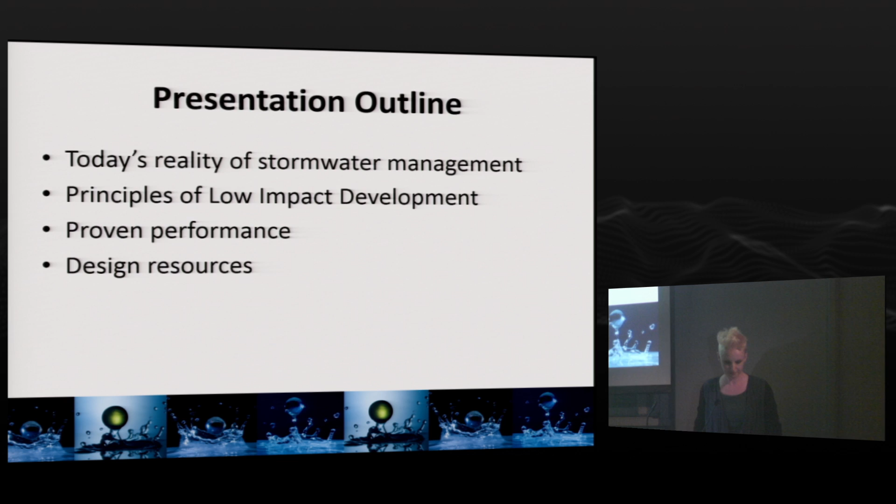So today's reality: well, I think everyone is aware, particularly with the events over the holidays as well as last summer, that our infrastructure is really under stress. And our stormwater systems have stress from a number of major factors.

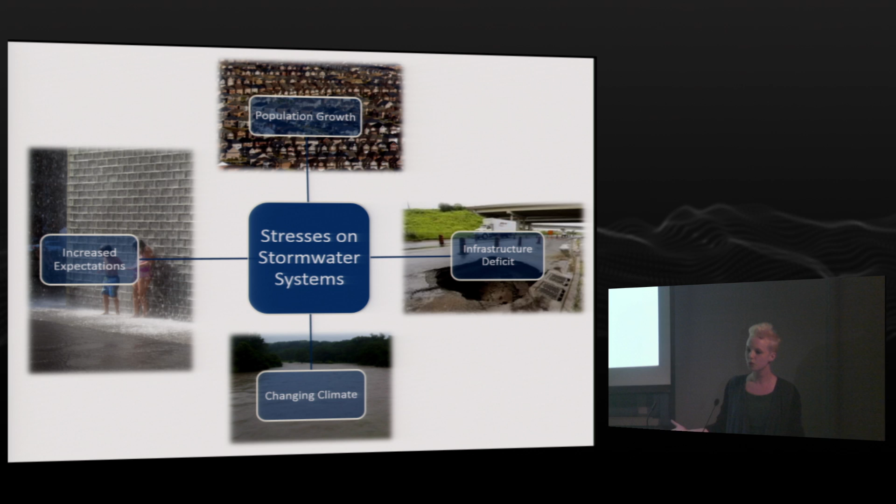The first is population growth - we have 50,000 people come to Toronto every year, and that's expected to continue for the foreseeable future. That builds water demand. On top of that, we have an infrastructure deficit, I'll give you some numbers about that in the next slides. But then we also have changing climate, which in Ontario means an increase in the frequency of extreme events. And lastly, every day our populations are demanding more of their water services. They have increased expectations. We want our water resources to not only give us clean drinking water, but we also expect to have recreational areas, and we expect to use water for a variety of purposes, sometimes with conflicting requirements.

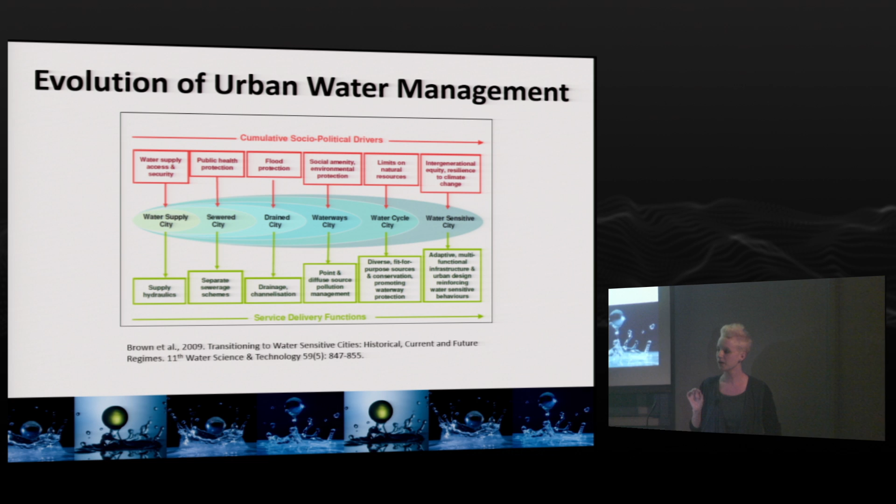So there's been an evolution of urban water management, and we see this throughout the globe. As cities have evolved, we start with just water supply, providing the necessity of life. But from that, we've grown, and we have subsequent infrastructure systems - the sanitary systems, then a storm system, then moving beyond that to whole waterways and water cycle focuses. So we recognize that if we want to have drinking water, we have to look at the big picture. It's not just - you can't just take one piece of the puzzle.

Some notable things that are specific to Ontario - most importantly would have been the Hurricane Hazel event. This has really defined flooding conditions and what's possible in terms of flooding as we've experienced it to date. And it led to the legislation that created the conservation authorities that we have today. Also, very significantly, it implemented decades ago floodplain management, which prevents development in areas adjacent to rivers where you're in areas of high extreme risk of flooding. So you don't have people there when the waters come, we don't have to rescue them, and we're not going to be worried about deaths or loss of property.

Moving forward, there's a real transition around 1980 where we start to see subdivision development post-1980 starts to have consideration for quantity control of stormwater. A lot of neighborhoods pre-1980 are built without a huge consideration as to where's the water going, what's the grading, what is going to be the capacity. And so we have a legacy of neighborhoods that don't necessarily have infrastructure that has been designed for stormwater management.

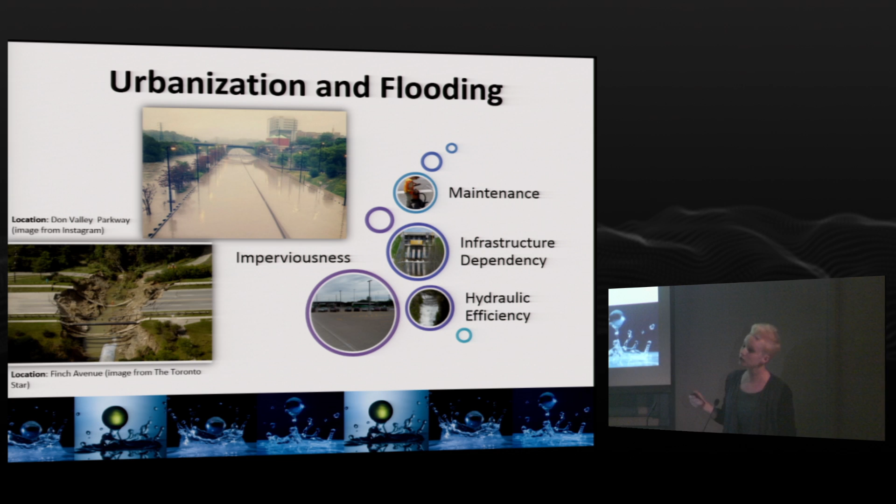We also have legacy problems such as the Don River, which has been channelized, moved, and restricted. So when we have these increased flows, there just isn't the capacity, and they spill over to elsewhere.

So the economics of all this are pretty astounding. The Canadian insurance industry, excluding this year which is a record book one, basically pays out approximately $1.7 billion a year in water damage claims. This number is even more impressive when you recognize that we do not have overland flow insurance in Canada. So any water that gets into your house running through that window at grade, you can't get insurance for that water. There's a lot of damage the insurance company isn't even paying out for.

On top of that, we know we have an infrastructure deficit. The Canadian government estimates this at $123 billion, and about $31 billion of that is infrastructure systems related to water and wastewater.

Lastly, the default system we've been using for all of our suburban development, stormwater management ponds, these are essentially collection systems designed to collect sediment and require their own maintenance, meaning excavating and removing that sediment once they hit their lifespan of about 15 to 20 years. The cost of these individual cleanouts is huge, ranging from $200,000 to $1.5 million.

The numbers of ponds that municipal cities have is also staggering. If you look at a city like Mississauga or Vaughan, developed post-1980, they have ponds in the hundreds that are just waiting, filling up with dirt year after year.

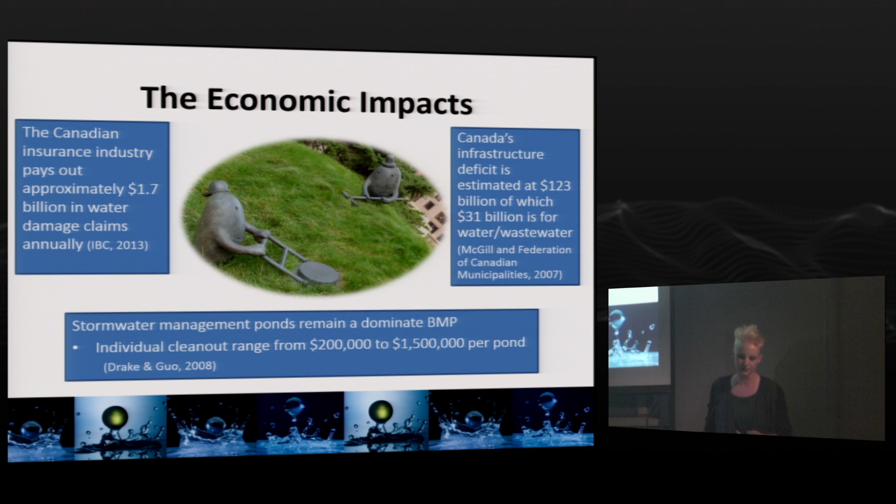So what is LID? It's a stormwater management strategy, a planning and design process. It seeks to mitigate the impacts most commonly associated with urbanization, which is runoff and stormwater pollution, through using a range of systems, strategies, and approaches which mimic as best as possible the natural flow path and natural water balance.

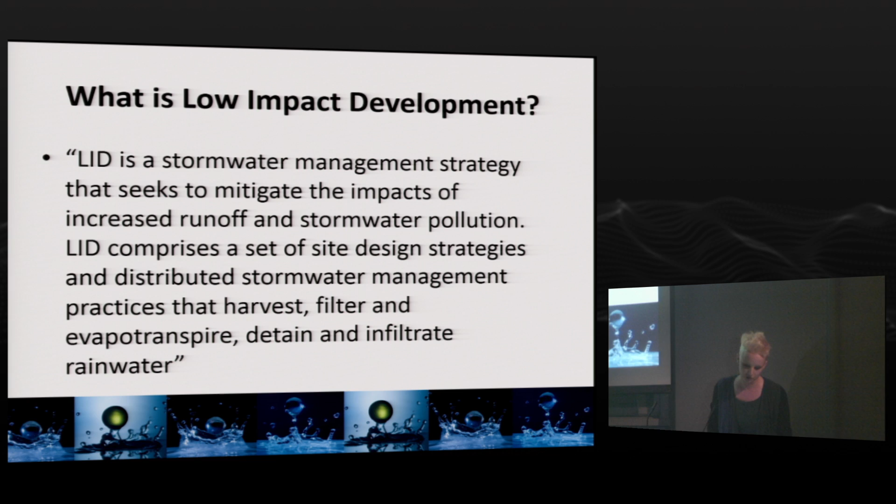The Toronto and Region Conservation Authority outlines 5 principles. Fundamental to these principles is the concept of a treatment train approach—actually following the water through the neighborhood, through the catchment system, and allowing for treatment and management along the way.

So you start with the source, and treat as much as possible at the source, convey it, and where you can, provide additional treatment and management while it's traveling to the end-of-pipe system, and finally end-of-pipe controls.

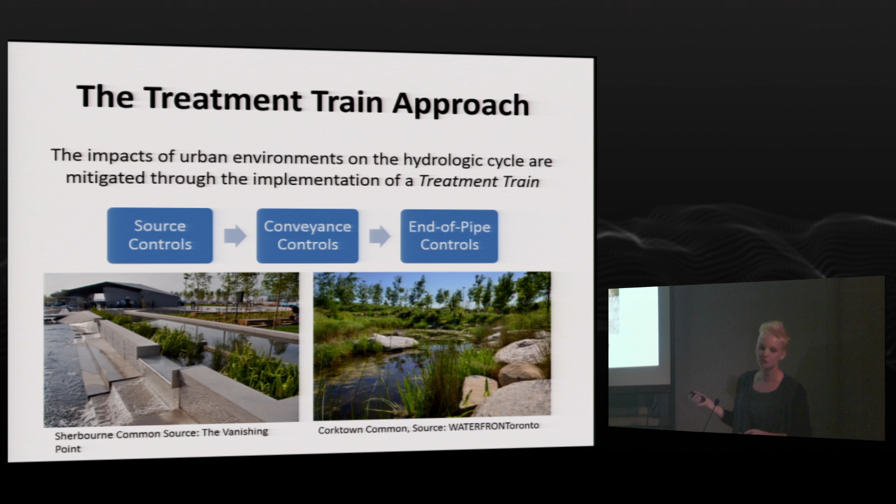So what we have here are two examples. This is Toronto's Sherbourne Common, where you can see filter beds that have been installed while the water is being conveyed to a collection channel. And this is the most gorgeous example of a pond I'm ever going to show—the Corktown Common and their stormwater management pond, which is an end-of-pipe approach or system.

The economics of green infrastructure is also gaining notice, and by some big players. If you look at most of the major cities in the US, they are all including green infrastructure as part of their 50-year plan for managing their city.

New York City estimates they will be able to save about $1.5 billion in investment by implementing green infrastructure, which reduces the number of combined sewer overflow events. And Philadelphia's Triple Bottom Line study found that LIDs offered almost $3 billion more in benefits than a traditional gray system.

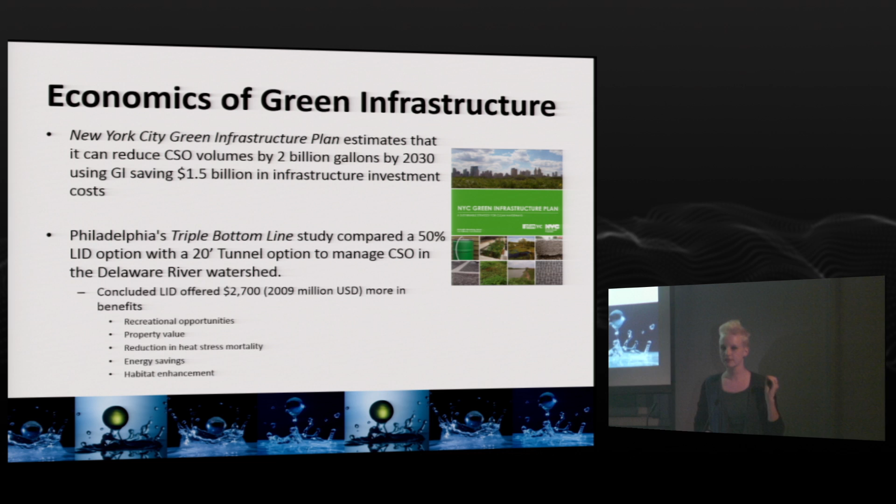So there's an economic argument that is making sense, which is supporting these technologies. The principles of LID, the first one, and if many of you are architects, this might seem like common sense, but to engineers it's not so much, is to plan and use the natural system as the starting point. Use the natural features that we have, the geology, the watershed scape, as our framework for planning our communities.

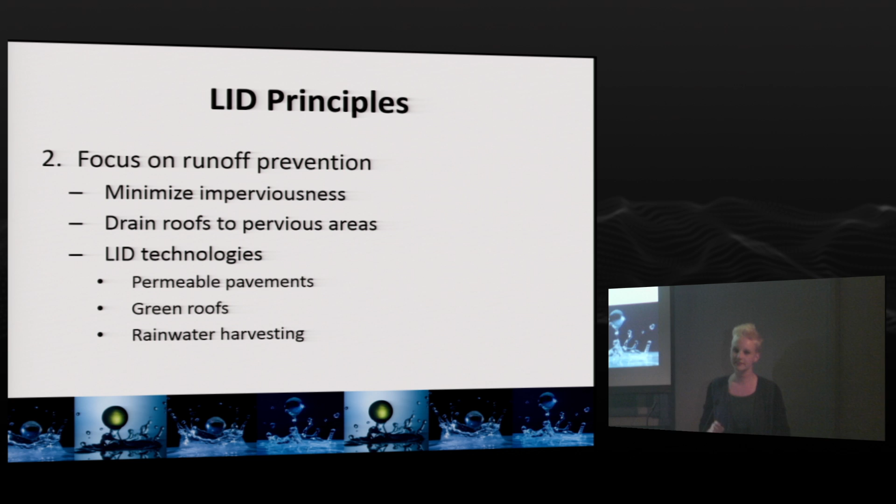It's mind-boggling for engineers. The next one is to focus on prevention, so minimizing imperviousness. Why do we need 4-lane parking garages? Maybe we could reduce that to 2. Or do we need to have a ranch-style house? Can we reduce or optimize the home so that we minimize the roof area? And then integrate LID technologies like permeable pavement, green roof, or rainwater harvesting on site so they can treat it.

This leads to my third one, which is treat stormwater as close to the source as possible. This is a really important planning paradigm shift because we're inverting the entire system. Instead of using end-of-pipe centralized controls, we're now spreading the management out so that everyone is a part of the management system, and everywhere along the way we're executing flood control and quality treatment.

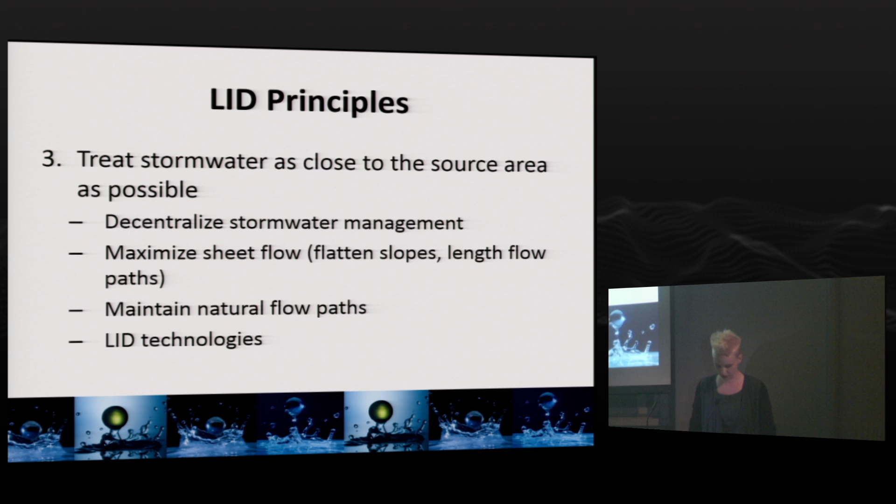The fourth principle, and again I think architects might find this fairly common sense, but for the engineering community it's a little bit of a light bulb going off, is to create multifunctional landscapes. As water resource engineers, we've dealt with this for years, that we expect many things from our water resources. We expect them to support industry and manufacturing and drinking water and fishing and recreation. So when we plan our communities, we need to recognize this.

It also leads to the way we manage public space, integrating stormwater systems into common areas like public spaces and the right-of-way. And lastly, it leads to designing for aesthetics. So why make our stormwater systems ugly? Let's make them enjoyable. Let's make them places that people can go and use and have a healthy life.

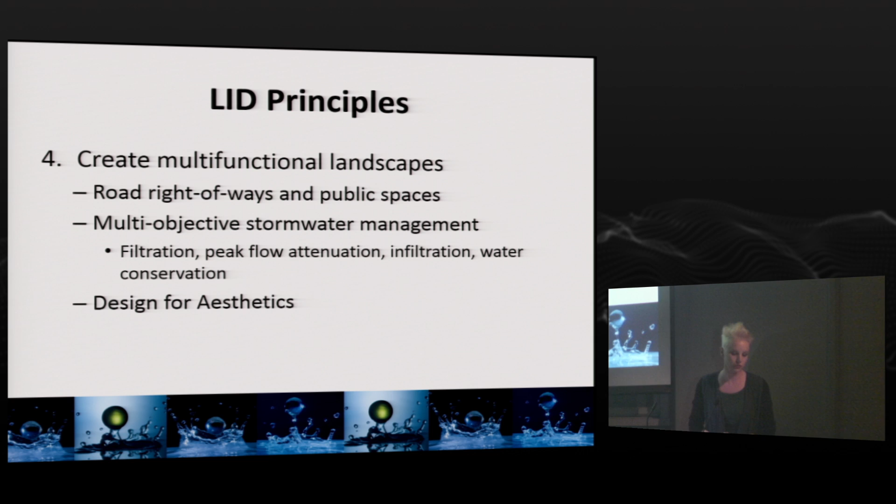The last main principle comes to education and maintenance. Because at the end of the day, these are still, although they might be soft engineering systems, they're still infrastructure, and they need to be maintained to be working functionally. So we need education for property owners, for municipalities, property managers, so that they know and value the stormwater systems that are under their control.

I can't tell you the number of times that I've called someone up to say, I'd like to visit your permeable pavement, and they go, my permeable what? Even though it's been 5 years, the property's changed hands, the new owner isn't aware that they have a really special parking lot. And this, because we're encouraging management on site, we need to establish new legal systems to ensure that we have a way of enforcing that maintenance is taking place.

So I am a big proponent of LID, and you might be wondering, if it's been around since the 90s, why don't I see it everywhere? These are the main challenges, and they still persist to this day. The first thing I find is when I talk to someone about LID who's had experience, the first thing is, oh, I remember I saw a technology or a system and it didn't work.

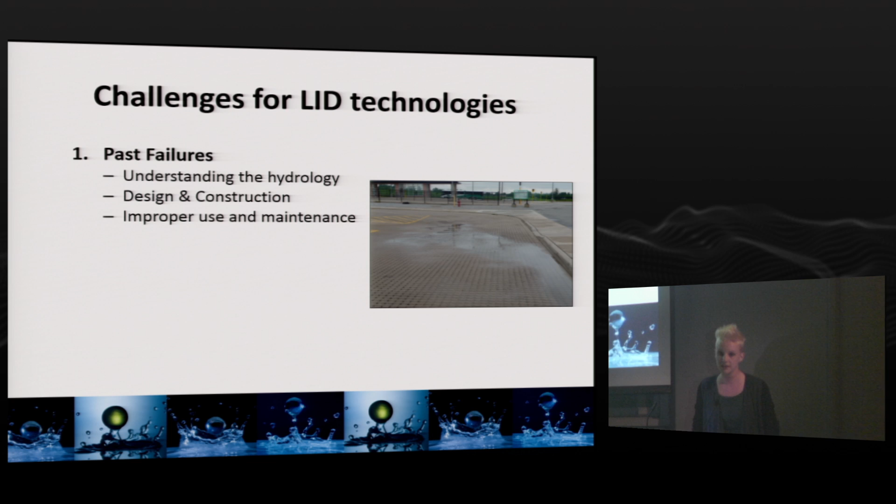With any new technology, there's a risk-taking factor that we can't avoid. When you're innovating and trying something new, chances are it's not always going to work out great the first time. This legacy of past failures and mistakes and learning that has taken place really sticks in people's minds and makes them very reserved about learning about the changes that have taken place over 30 years.

The next major obstacle is the issue of private ownership, and municipalities are still grappling with how are we going to manage this and how are we going to be confident that the oil grit separator in the new shopping complex is getting cleaned out every year.

There is also, in many cases, an emphasis on the industry just to sell the product and then walk away. And so maintenance procedures really haven't been developed or explained. So even if someone wants to properly maintain it, they may not have the resources available to tell them how to go about doing it.

The other challenge is, how do we actually do the math when it comes to the cost dollars? Because we're completely changing the system, moving who's responsible for management from public to private, there's a perception that private enterprise may not appreciate the services they're receiving on site because they had been done for free by someone else in the past. So we have this challenge of accounting for benefits and understanding the true costs and life cycle costs of these systems.

And then lastly is public education. Sadly, many engineers today, if you're getting training at a university, you might not learn how to design a permeable pavement system. That's really not part of our curriculum yet. So we still need to educate a whole new generation of designers to create these systems.

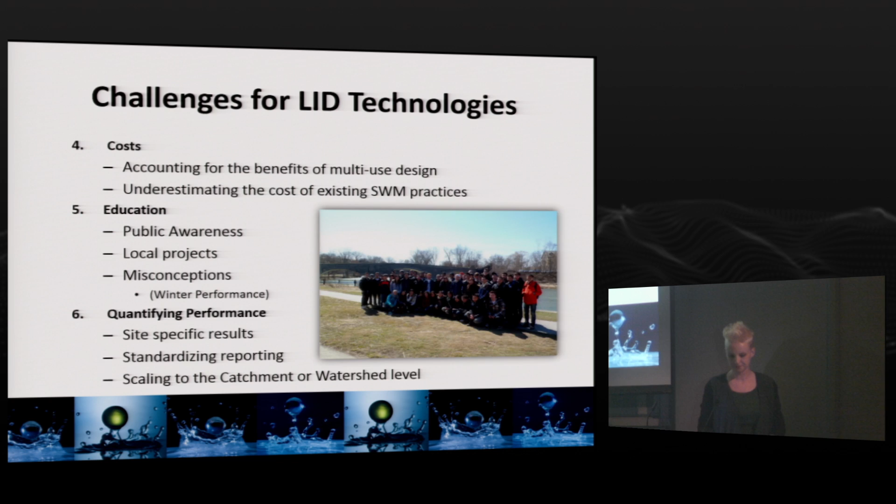Now, before I start talking about some examples in Ontario, one other major change taking place here is an adjustment for how cities see stormwater management. For the first time, they're really recognizing that it is a service that, like any other service, has a dollar value attached to it. The front runner for this was the City of Kitchener, who implemented a stormwater utility in 2011. So residents of Kitchener now pay a stormwater utility tax based on the impervious area of their property - based on how much stormwater they're generating.

The second phase of this, which they're now rolling out, is a credit program where residents can receive a credit if they implement systems that allow them to treat and manage stormwater on site. And if you were skeptical that maybe this is or isn't catching on, the City of Mississauga has voted through almost identical legislation in the past year. So we've got some really big cities changing, basically putting dollar values for the first time ever on stormwater management.

Now, this is probably what everyone's really waiting for, the interesting stuff. I'm going to talk about 3 of the most popular permeable systems in the province, starting with my favorite, which I've done a lot of research on: permeable pavements. In case anyone isn't familiar, a permeable pavement is a system with a regular paving surface, but it's designed to have either a very coarse surface, like this pervious concrete, that has voids, or an interlocking block with open joints filled with coarse aggregate. So rainwater, when it falls, goes straight through into the underlying aggregate layers.

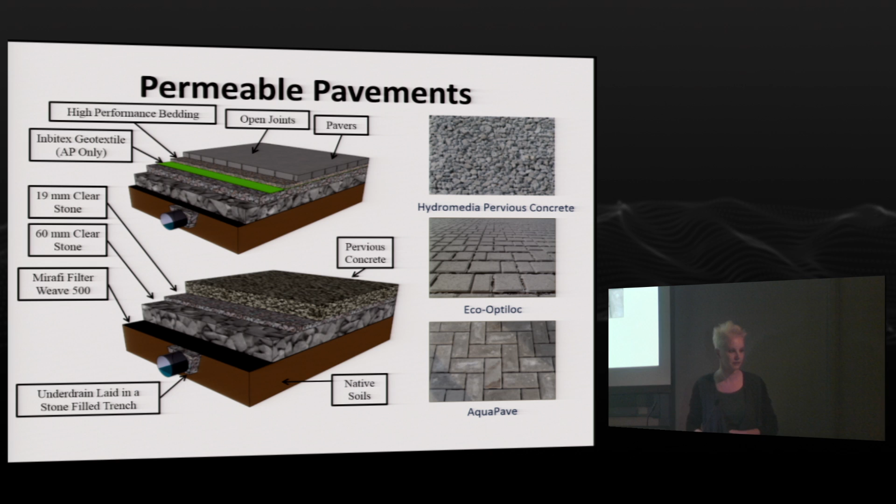What I have here are 3 products that I have tested with TRCA: pervious concrete, Eco-Optiloc, and Aquapave. Another product that is available but we don't see quite as much in Ontario would be pervious asphalt - it's very popular in the US, not so much here, not really sure why. The site I'm going to give you some information about is the Kortright Permeable Pavement Parking Lot, in Vaughan. At this site we studied 3 side-by-side permeable pavements and a regular asphalt parking lot for 2 years to actually see how well these guys work.

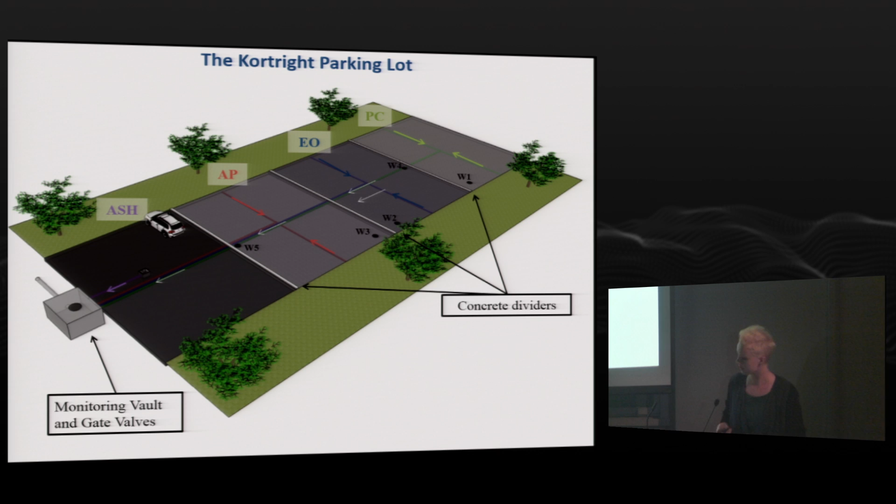What we had is, basically, we constructed - you can't see it, but where that little orange pylon is, right at the base, we have a below-grade monitoring vault where all our equipment was stored. We had control valves so that we could actually close them and hold the water inside the pavement and the aggregate if we wanted, or open them up.

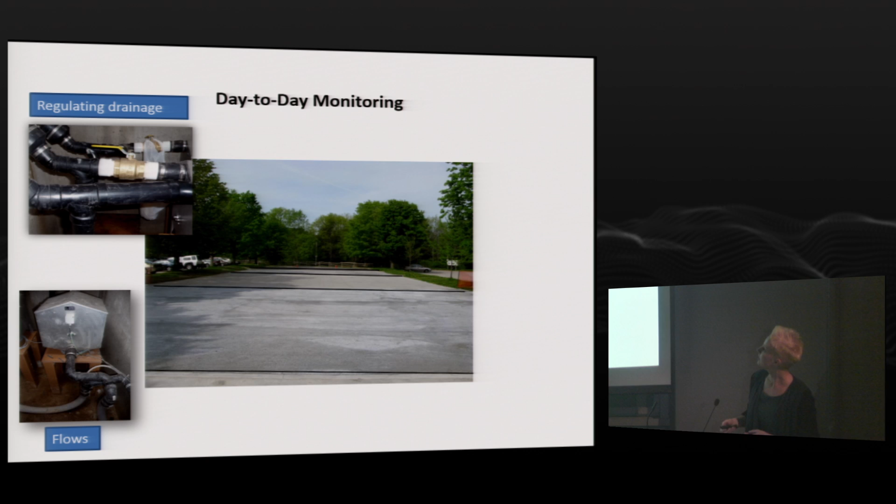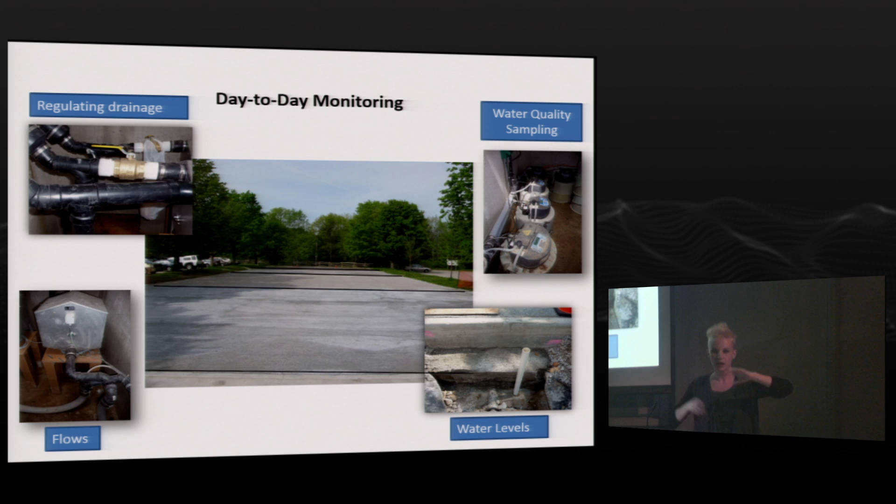We had tipping buckets so that we could continuously measure the flow of water out of the pavements from the base. Samplers so that we could collect water samples during a rain event and actually look at the quality of the effluent and the runoff. And then wells so that we could see how high that saturated amount of water was inside the pavement. And this is what we saw.

This is a typical storm. We've got a little rain event here. You can see we had a little bit of rain, and then you get a typical summer storm, a short period of high-intensity rain. What you see here in the black is the water coming off that asphalt. It's instantaneous - as soon as it gets wet, it's into the catch basin and it's going out.

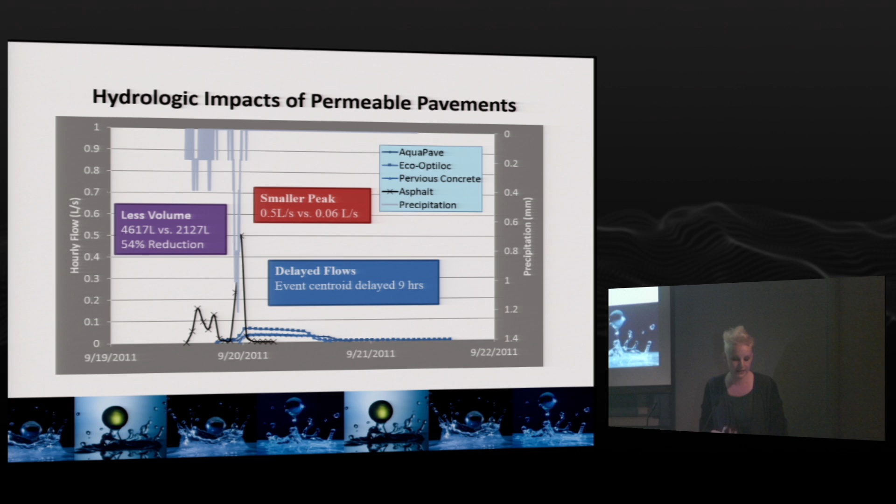So you have really peaky amounts. The permeable pavements, however, take a longer time. That water has to infiltrate. It takes time before it's going to leave. And then when it does, it comes at a very slow, steady rate, resulting in a very gentle and long trickle. So we saw reduced total volume, reduced peak flow, and delayed flows.

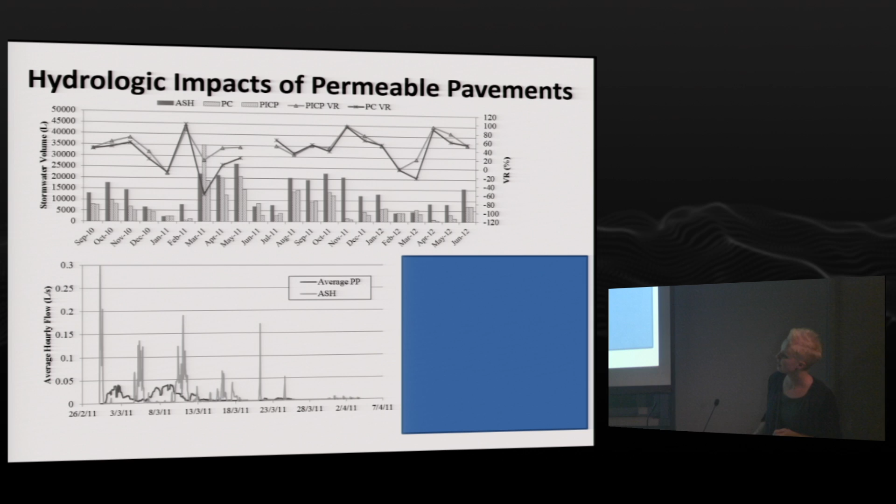When we looked at the entire study, you can see these columns - the dark one is asphalt, and then these are the permeable pavements. This is the volume reduction calculated each month. What we found overall was a 43% reduction in the total stormwater outflow.

We monitored about 130 rainfall events. Only 59 produced anything coming out of those underdrains. The rest of the time, all of the rainwater was captured, infiltrated, or evaporated by the permeable pavements. When it did produce effluent, the peak flows were reduced by at least 50%. On average, it was closer to 90%. We had a few extreme lower ones in the winter.

And we would always see an increase in detention time. These benefits, these patterns, happen in the winter as well as in the summer. What you can see here is our spring thaw of 2011. This is the runoff coming off that asphalt, and the black is the permeable pavement. We actually shifted the center of that spring thaw by 3 days - we delayed it by 3 days.

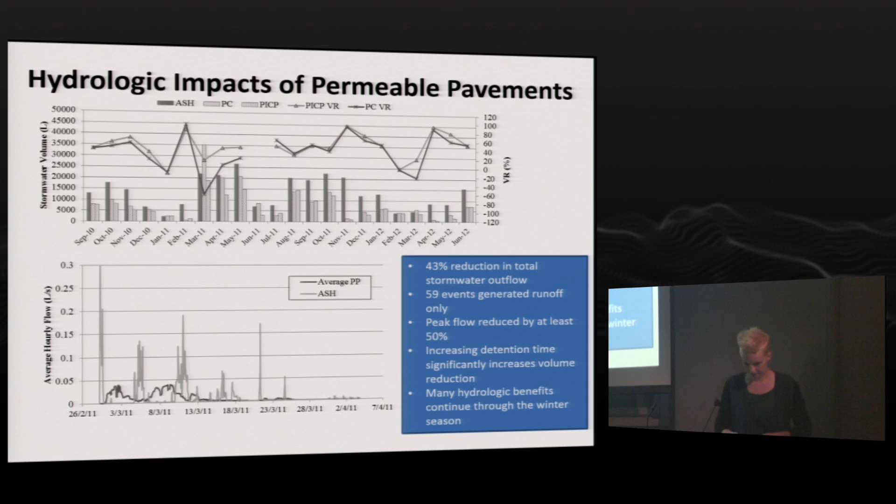We also saw big benefits to quality. So it didn't matter if you're looking at suspended solids, heavy metals that are of concern like copper or zinc, or even nutrients like nitrogen or phosphorus. Because the permeable pavements are a passive filter, they can remove the particulates in the stormwater and produce a cleaner effluent at the end.

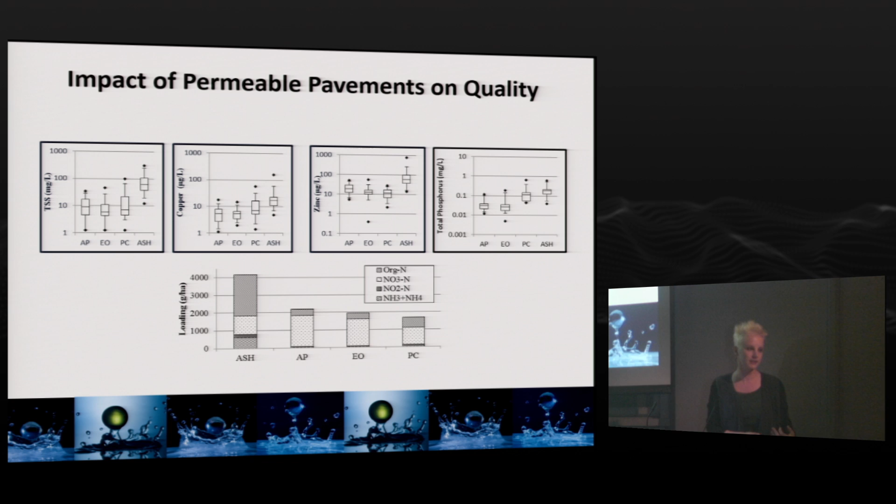We also saw for complex things like nitrogen, detaining the water allows for some denitrification to take place, and we actually changed the species of nitrogen, eliminating forms such as ammonia, which is very harmful for aquatic organisms.

Now, permeable pavements do clog. This is something that is going to happen - I'm not going to try and beat around the bush. It's a process that is very product dependent, because it's directly related to the amount of area you have on the surface. So if you have very narrow joints, you're going to have to maybe clean it a little bit more frequently. What we saw here are just some ranges.

This is the surface infiltration capacity - sorry, I don't have a label here, but this is the pervious concrete, Eco, and Aqua. So the more surface area you have, the longer it lasts, but they are all going to decline over time. As you can see, this is over 4 years.

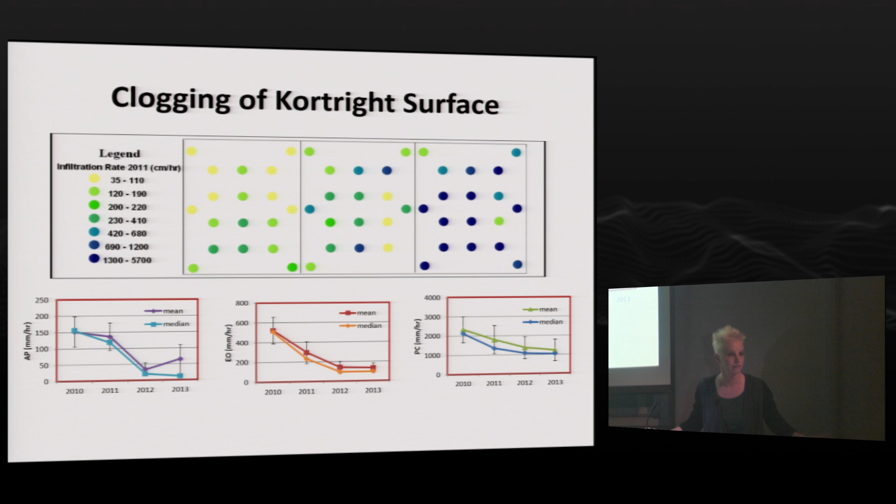But it's important to note, the infiltration capacity of most of these systems is an order of magnitude higher than the rainfall intensity we ever receive in this province. So we still have, even after 4 years, on pervious concrete and the Eco-Optiloc, we don't have any runoff. Everything goes into these permeable pavements.

Now, the next product I'm going to talk about would be green roofs. Green roofs are very popular here in Toronto because of the bylaw. In case anyone isn't familiar, a green roof system is a thin layer of vegetation and soil media.

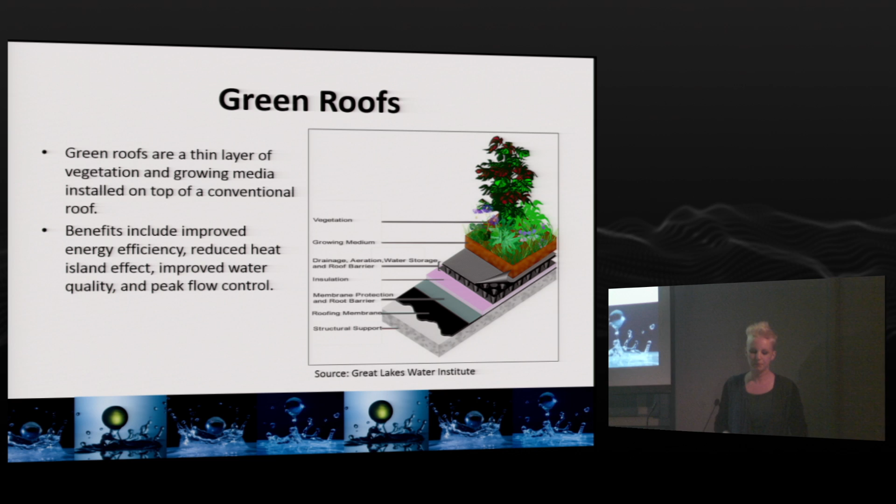The benefits are multifunctional. It provides benefits to stormwater management, but also improves energy efficiency and reduces urban heat island effect.

And the most exciting research that's going on is actually right here. This is a picture of the Grit Lab, which I'm so privileged to be working with now. What we're trying to do here at the Grit Lab is really provide the information that industry needs to maximize this technology for evapotranspiration and stormwater management.

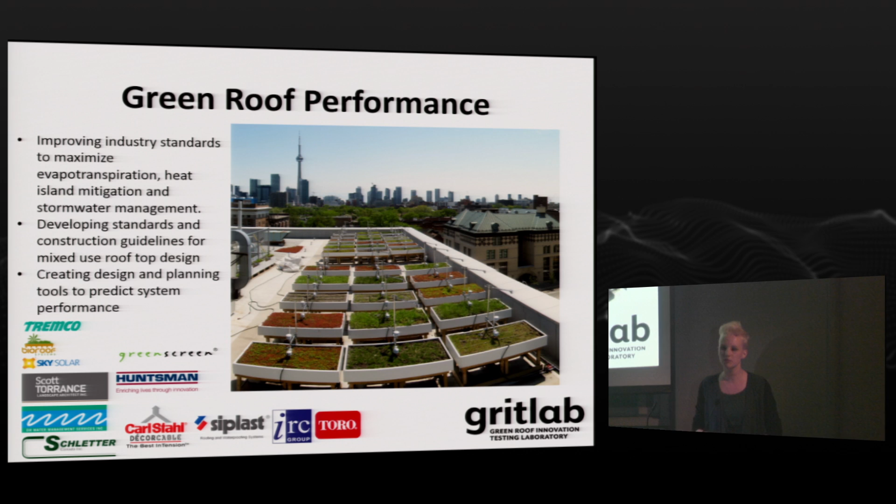So how can we really customize the systems so that they're optimized for the climate we have here, which will allow us to come up with improved and more appropriate standards and construction guidelines, and then develop the design tools so that we can really predict accurately the performance of these systems.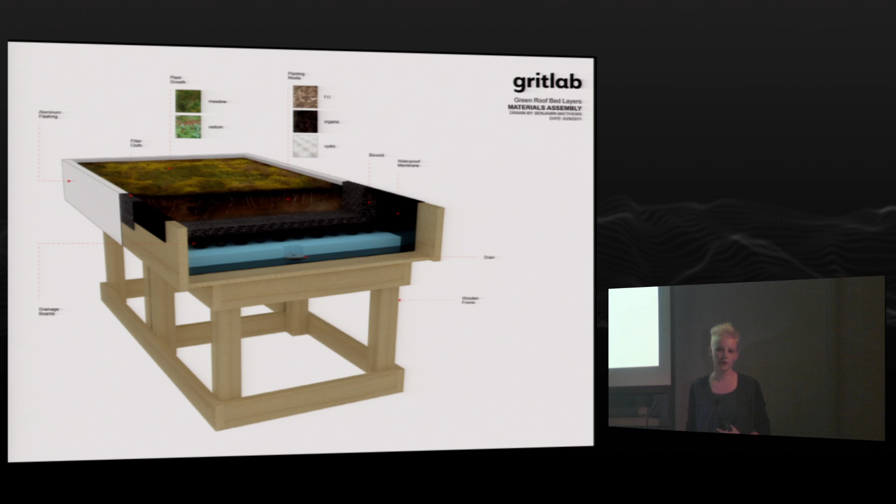What we're looking at, and this is a figure from the Grit Lab, is we have testbed modules looking at the different components that go into green roof design. So we're looking at things like the substrate depth, the planting media, as well as the soil media, and then the irrigation regime. We're going to see how these different things affect the performance, the resilience, and what combination is really going to allow us to maximize stormwater management.

And it's a 12-year process. This is a picture courtesy of my graduate student, Jen Hill, of the lab just a few weeks ago. It's fascinating because the longer you look at something, the more details you start to notice.

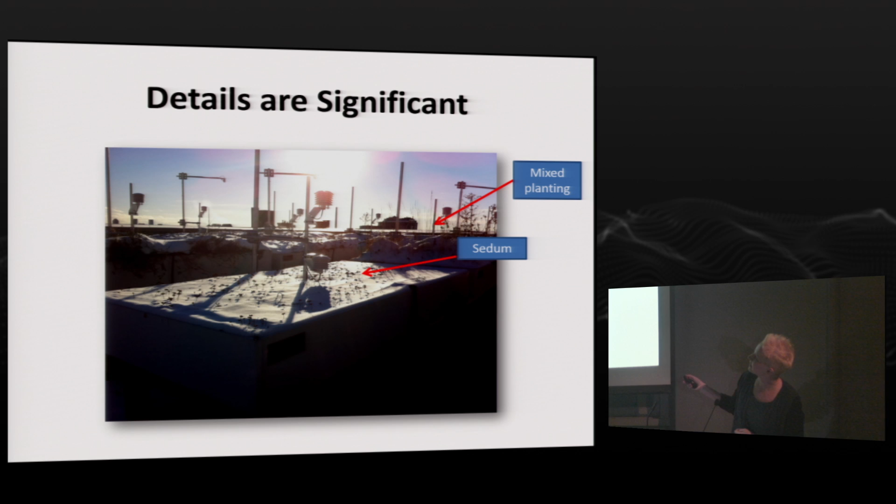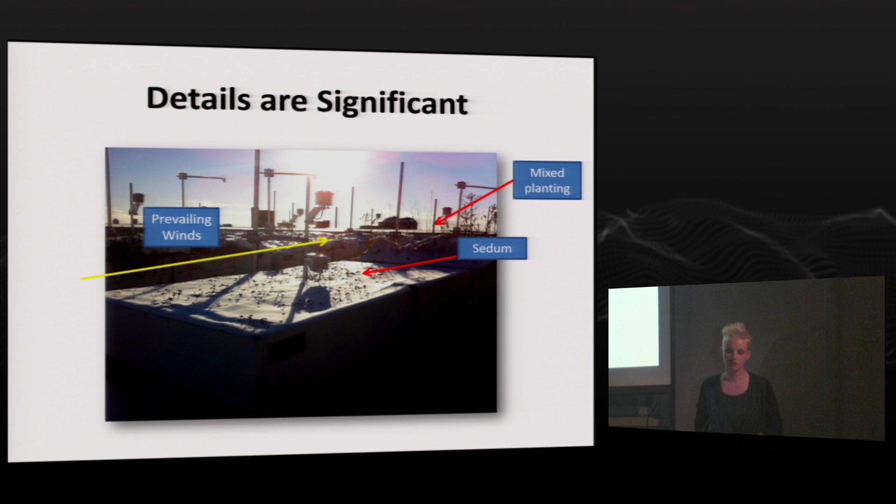So we can start seeing things like the impact plants might have on soil, or the impact prevailing winds have on snow accumulation. We're really going to be able to answer so many questions from the studying that we're doing up on the top of the roof.

We also have phase 2 of the laboratory. I'm very privileged, with 2 other professors, Professor Sleep and Margolis, to have been successful in getting a grant just this past fall, which is going to allow us to fund students for the second phase, which is going to look at integrating green roofs and solar panels into the same space. So instead of thinking of these as competing green technologies, why don't we put them both together and everyone's market share doubles?

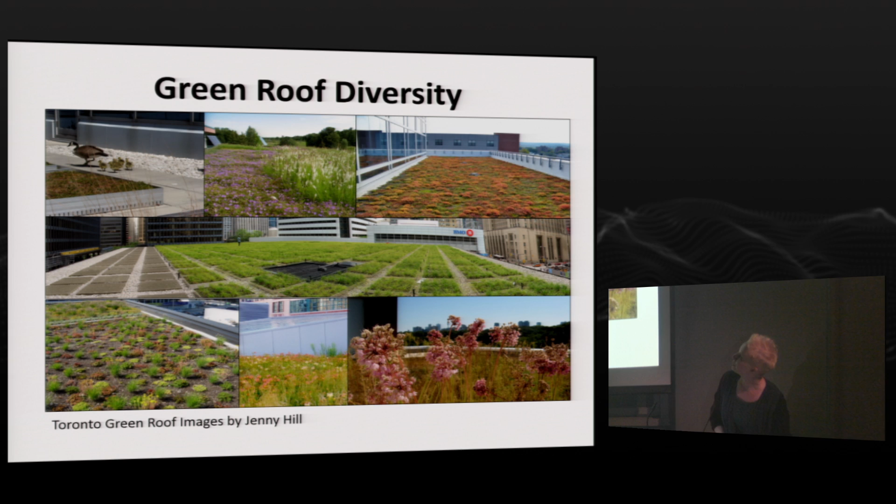Other research going on through the university: my student, Jen Hill, is essentially conducting the most extensive survey of Toronto green roofs that's been completed to date. It's absolutely amazing as we get this bird's eye view of the sheer diversity of green roofs that we have as part of our city.

These are her 2 assistants in the summer, but she's been collecting samples so that we can actually look at what is the media that is on top of the roofs we have now, which ones are not performing, and how can we make connections between the characteristics of the soil and the conditions we see in the field as they grow, age, and evolve.

So some numbers, because I know that's also everyone's favorite: green roofs have been proven to be effective here in Ontario. TRCA conducted a pretty intensive monitoring program, a few years old now, of York University's green roof, and reported that if you look at the summer months, the green roof is going to retain about 63% of the runoff. It was able to capture it and evaporate it on site.

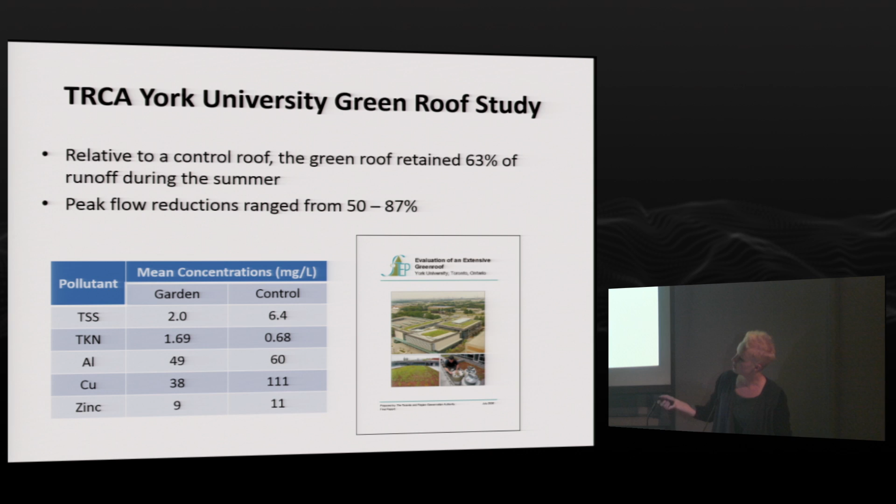The last system that I'm going to be covering is bioretention systems.

Bioretentions are another filtration and infiltration practice where they provide temporary storage, focusing often on water quality events, so small storms. They are an engineered area with engineered soil, very coarse, to have space for that water and the capacity to infiltrate it rapidly. Depending on your soil conditions, infiltration occurs either right into the ground or we collect it in underdrains.

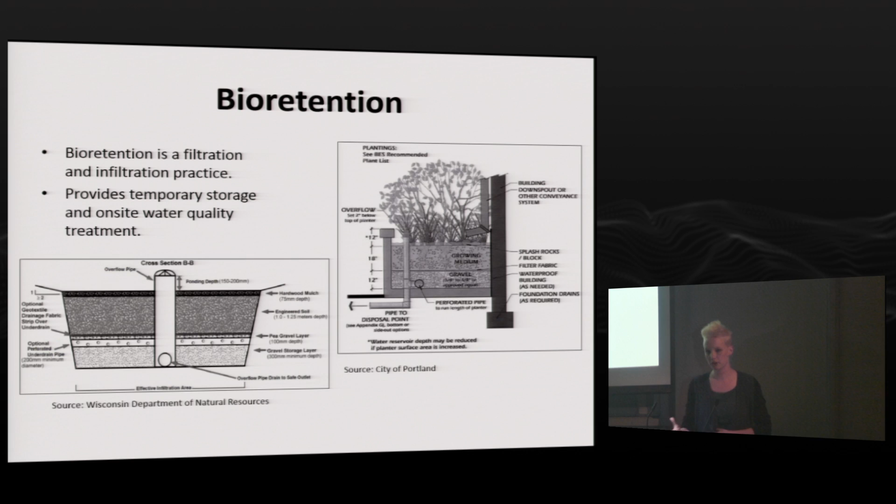We will also have overflow systems as part of these, because they'll be designed to have a very small ponded area, not anything more than about 200 millimeters. If we have water flow events beyond that, they overflow, because the emphasis here is on small storms, which actually contribute the majority of the pollution into our rivers.

There are a number of examples of bioretention systems in Ontario. Unfortunately, there isn't as much data. There have been some really interesting studies at pilot scale, mesocosm, lab bench sort of size, but there is research going on at the full scale capacity. This one is MTO's first bioretention, located in Beamsville off the QEW towards Niagara Falls. The Credit Valley is currently studying 2 bioretention sites at Lakeview and Elm Drive. And TRCA, Toronto Region Conservation, is studying a bioretention system located in Vaughan.

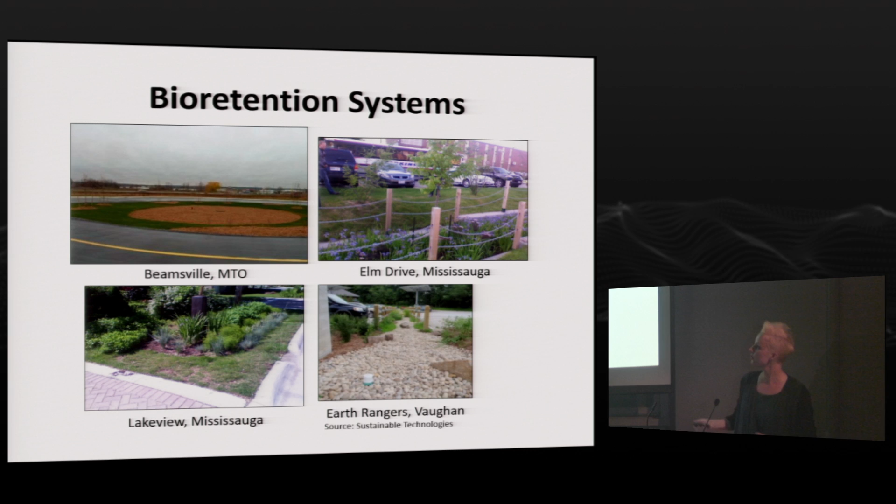As you can see, there's a variety of ways you can do this. You can do it with a very plant-intensive approach, but then there's also basically rock garden approaches where you have very minimal vegetation.

So the last section is no more excuses. These are the design resources. This stuff can be built if you dream it. The resources we have available are actually quite a few, and it was a legitimate argument in the past that there weren't design resources available, but not so much today.

First and foremost, we have the MOE's Stormwater Management Manual from 2003, which does reference all of these technologies as viable options. More specifically, the Credit Valley and Toronto Region Conservation Authority collaborated to write our own LID Stormwater Management Planning and Design Guideline. This came out in 2010 and is available for free online.

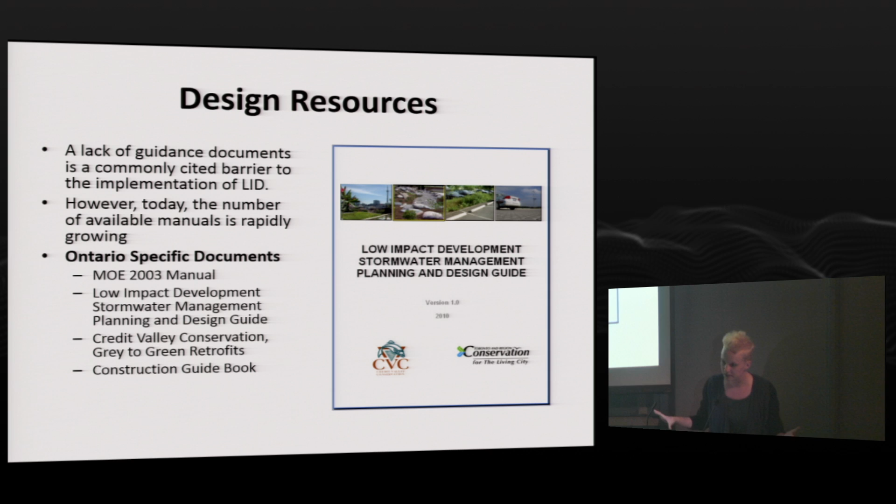On top of that, Credit Valley is working on new manuals specifically looking at the retrofit situation, where you're retrofitting an old parking lot or an old property. And TRCA is updating a construction guide to give all the details of how to actually construct these systems.

The Showcasing Water Innovations was a provincial program which is wrapping up. Through this funding resource, Credit Valley was able to construct a number of pilot projects, including those 2 bioretention systems that I showed previously. Every study they do is made available online, so you can look at how it was built and what they're monitoring as the system ages and evolves.

They've been looking at these products, looking at how we integrate them into industrial and commercial landscapes, how we put them into the right-of-way, into residential neighborhoods and public property, looking at the different real development or land use types that we have in our cities.

There is also design software. It's a very gray line when it becomes landscape architecture versus engineering. It's not always clear when it's one domain or the other.

But for engineers, EPA's SWMM model has been updated now for a few years to include all of the most commonly used LIDs, like permeable pavements, infiltration trenches, green roofs, and bioretention. So we can model the flows of these systems for a neighborhood. That's not a problem anymore.

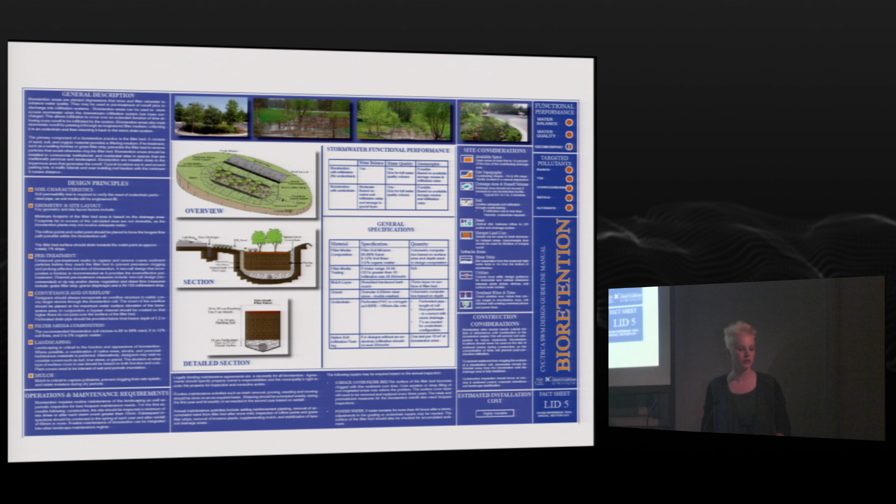And if Ontario isn't your thing and you want to look abroad, in the US there are a number of manuals also free for download, including one focusing on highway development, and the Urban Stormwater BMP Performance Monitoring Manual, which outlines how to study a parking lot or monitor it after you've built it, so the property owner knows when it needs maintenance.

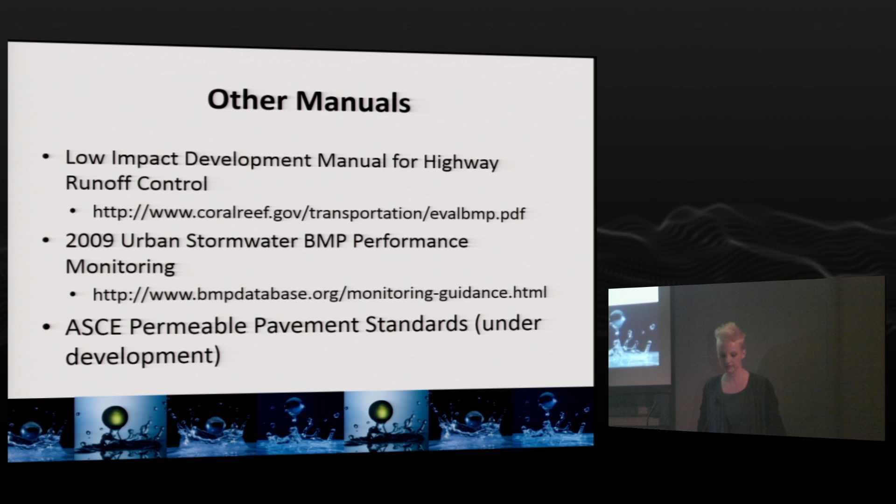Another little plug, unfortunately probably not available until 2015, but I'm on a committee developing permeable pavement standards through the ASCE. These standards will outline everything about the design of a permeable pavement system, from construction to water management to maintenance and structural loading.

If you want to find an example of a low-impact development technology in your neighborhood, my recommendation is to go to the ISWM, operated by TRCA, which has a whole database of different LID sites in Ontario, with nice fact sheets about what was constructed, when, what size, and all that information available online.

If you want to go internationally, the US for whatever reason likes to use BMP as their acronym instead of LID—every region has a different name. The International Stormwater BMP database has examples of LID systems around the world: many US examples, a bunch from Europe, and some Australian examples as well. So there really is a wealth of information now for designing and finding out how these systems have performed. Many of these are research sites with a lot of data available, not just pretty pictures.

That brings me to the end, and my take-home point is, as with anything, these systems are only going to be effective if they're designed right, and to do that you really need to be educated. I hope from this lecture you've learned a couple of examples not too far away of LID systems being studied and shown to work here in Ontario. The future is very bright. Thank you very much.